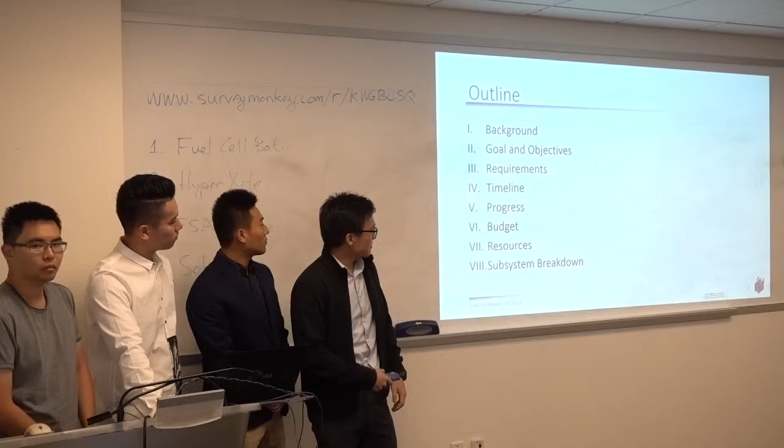So these are the general outlines that we're going to go through today. I'll be introducing the background and some of the progress that we've made, budgets and resources, and we're going to end with the subsystem breakdown.

As far as the background is concerned, this graph is showing the past discoveries of fossil fuel and the rate of consumption. Based on this trend, we see that because of limited supply and increasing demand, someday we're going to have a shortage in fossil fuel.

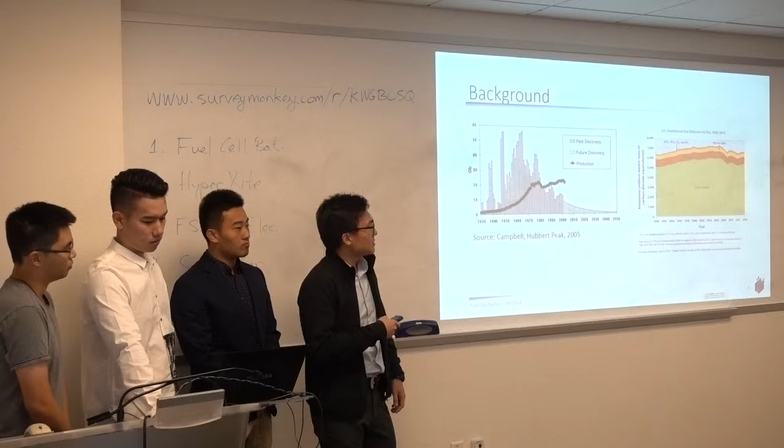This graph is showing the emissions caused by burning fossil fuel, such as gasoline, methane, natural gas. With this graph, we see that with an increasing consumption rate, we're going to have an increase in the polluting criteria.

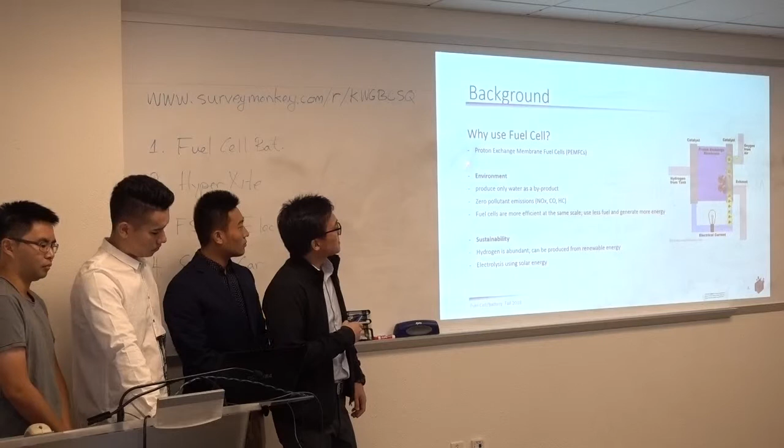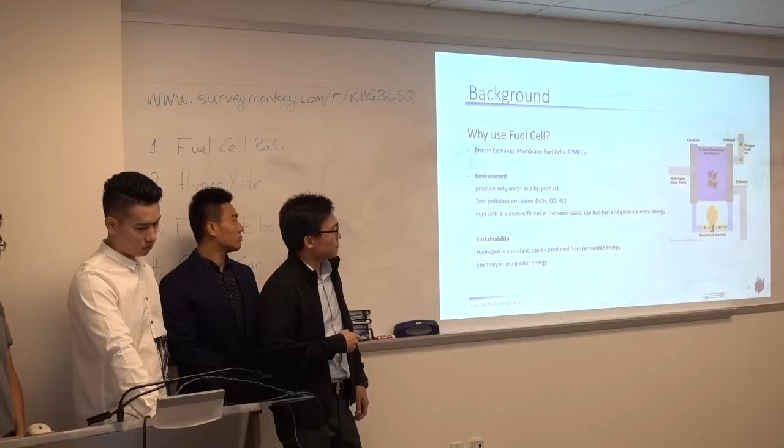With this issue, I think fuel cell is the next energy production device, because with fuel cell, especially with proton exchange membrane fuel cell, the fuel cell is operated by pure hydrogen. The good thing about injecting pure hydrogen is that water is the only byproduct, with zero pollutant emission, because there's no carbon molecule within the fuel, and the temperature is relatively low, so we don't create NOx.

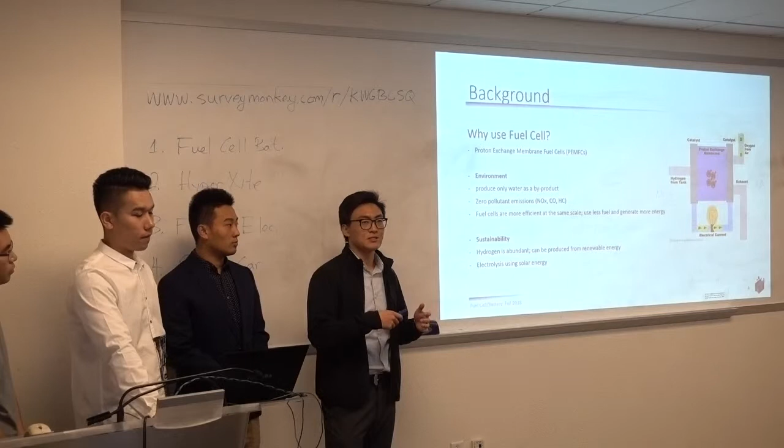The good thing is that fuel cells are generally more efficient than combustion engines, because fuel cells are not restricted by the Carnot efficiency, but instead restricted by the change in Gibbs energy, which is determined by the electrochemical potential.

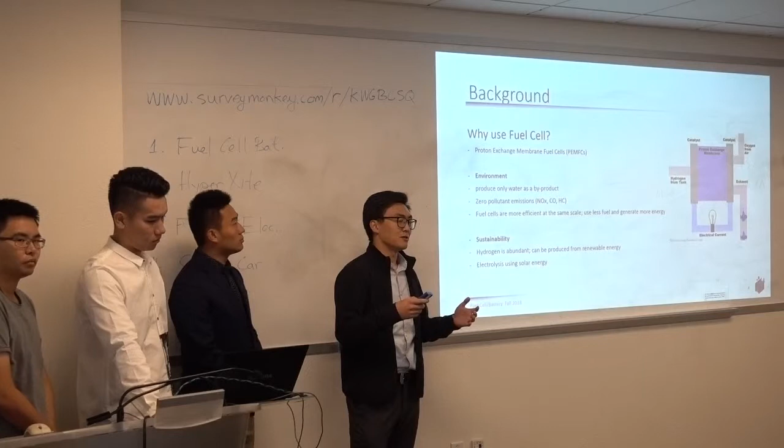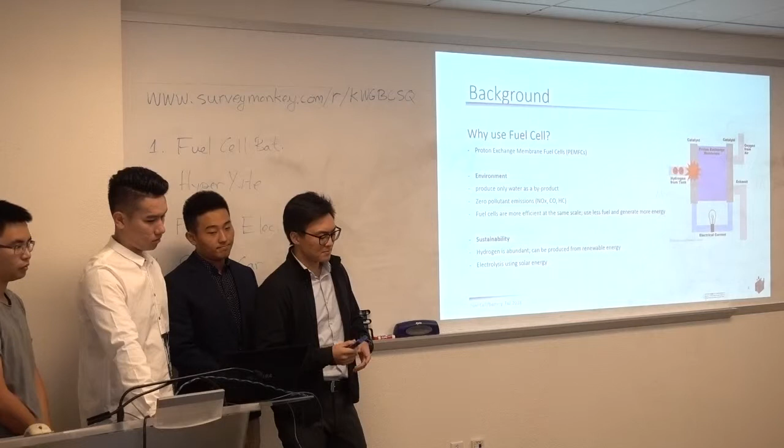As far as sustainability is concerned, hydrogen is abundant, you can find it anywhere, but we have to somehow separate hydrogen from other sources such as water. I think electrolysis is a good way to separate hydrogen from water. There is a lot of ongoing research showing how efficient electrolysis is and how we can separate hydrogen using solar energy.

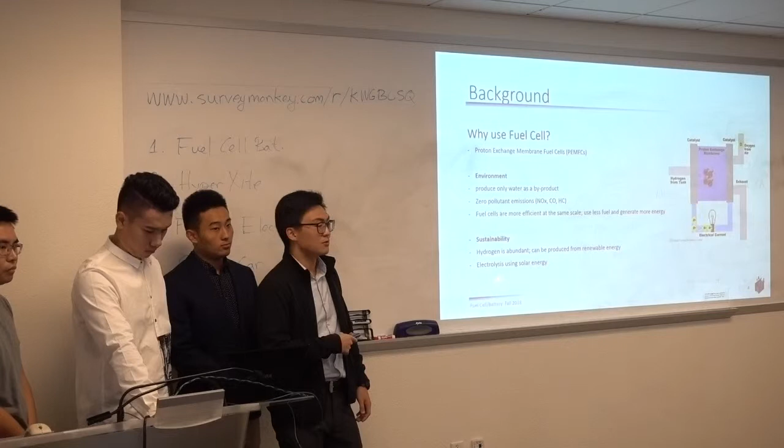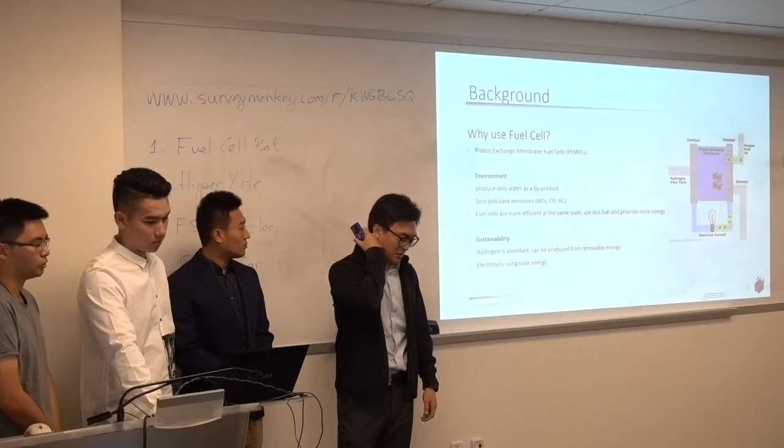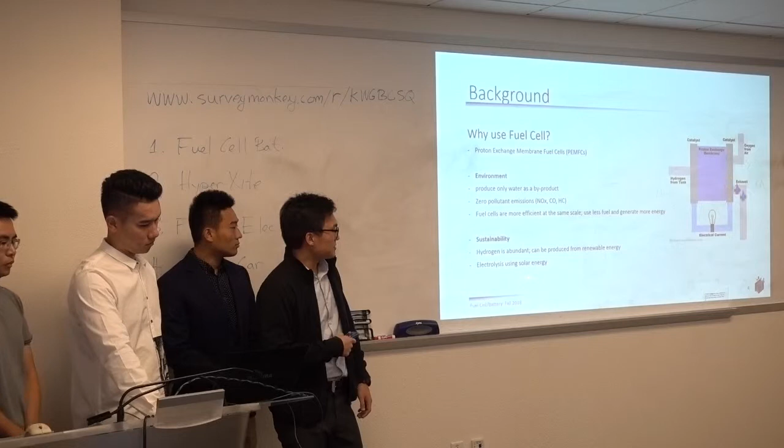There's also another research that Professor Brau is doing on using curtailed wind energy to separate hydrogen from water using electrolysis. So I think that as technology develops, we can have both renewable and sustainable energy.

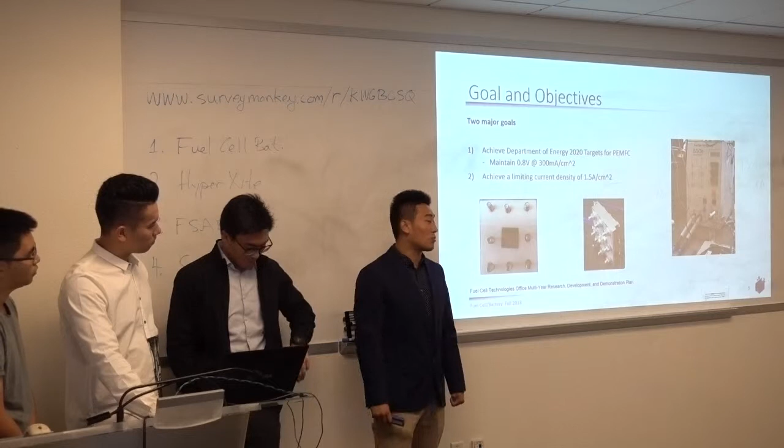As for the goals and objectives for our fuel cell battery, we have two main goals this whole year. We need to achieve the Department of Energy 2020 targets, which is to maintain 0.8 volts at 300 milliamps per centimeter square. We also need to achieve the limiting current density, which is about 1.5 amps per centimeter square. These two pictures show our fuel cell.

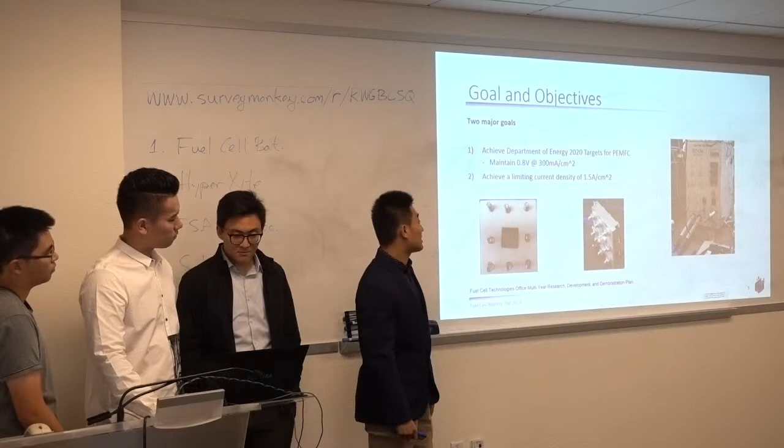This is the test station that we used for testing. We set some requirements for our sub-teams. For manufacturing, we hope that they set the limit for the bipolar plates and also the channel depth. We want our porous media porosity to be greater than 80%.

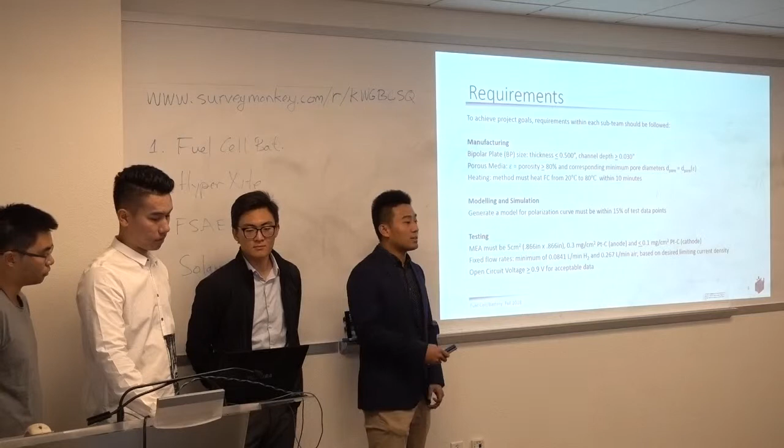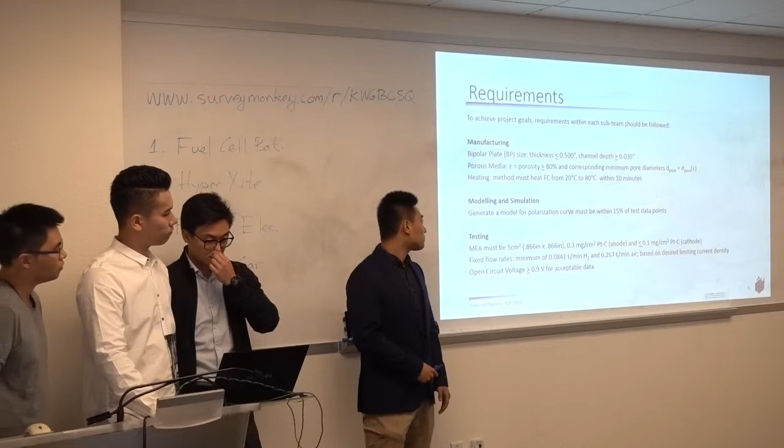We hope that the heating pad could only take 10 minutes to heat our fuel cell from 20 to 80 degrees Celsius. As for modeling and simulation, we hope that we can generate a model for the polarization curve and keep that within 15% of our data points.

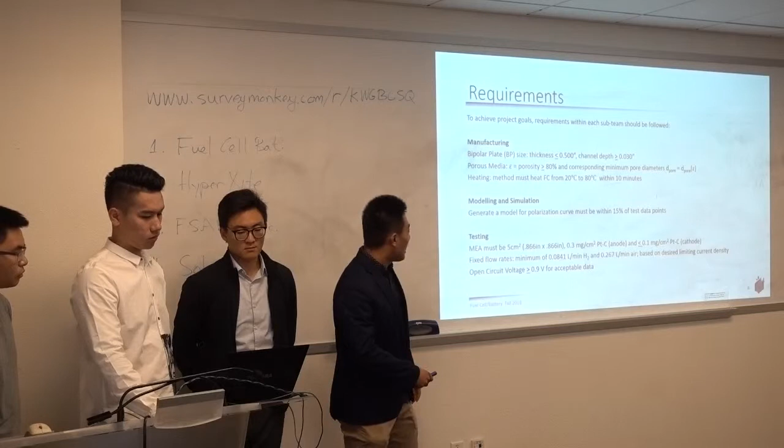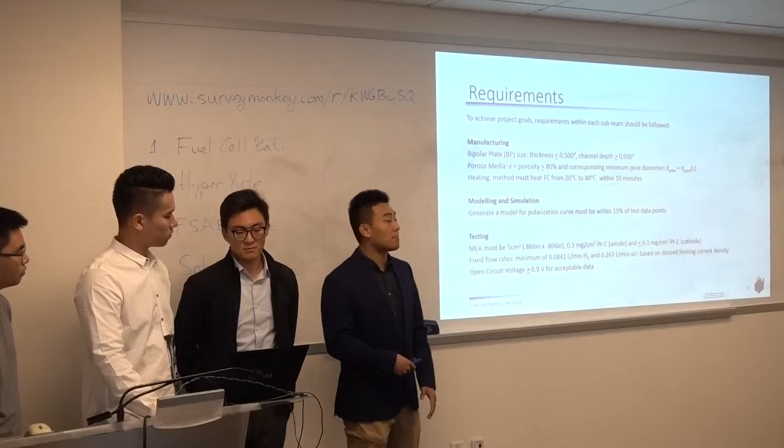For the testing team, they have to set the requirements for the MEA, and they need to calculate the flow rates based on the desired limiting current density. Before they can take measurements, we hope that we can achieve our open circuit voltage greater than 0.9 volts, because that's the minimum requirement for the PEM fuel cell.

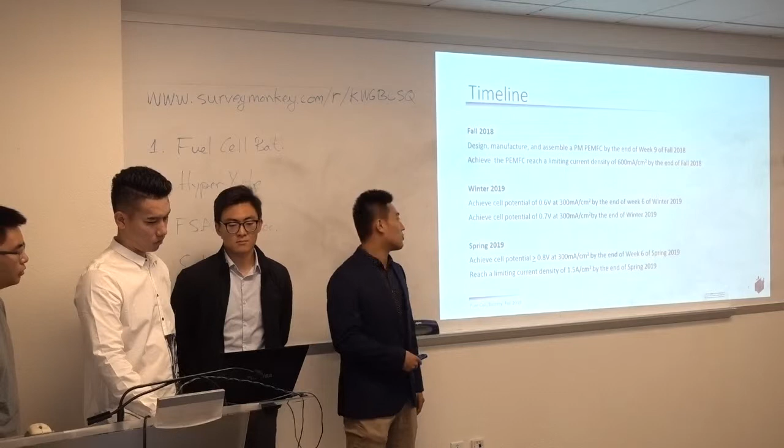For the timeline this year, we hope that we can finish our design and manufacturing by the end of week 9 this quarter, and do some testing to reach a limiting current density of nearly 600 milliamps per centimeter square. Heading into winter 2019, we hope that we can achieve 0.6 volts and 0.7 volts, both under the 300 milliamps per centimeter square.

By the end of the spring quarter, we hope that we can achieve our ultimate goals, which is to maintain 0.8 volts at 300 milliamps per centimeter square, and also 1.5 amps per centimeter square for the limiting current density.

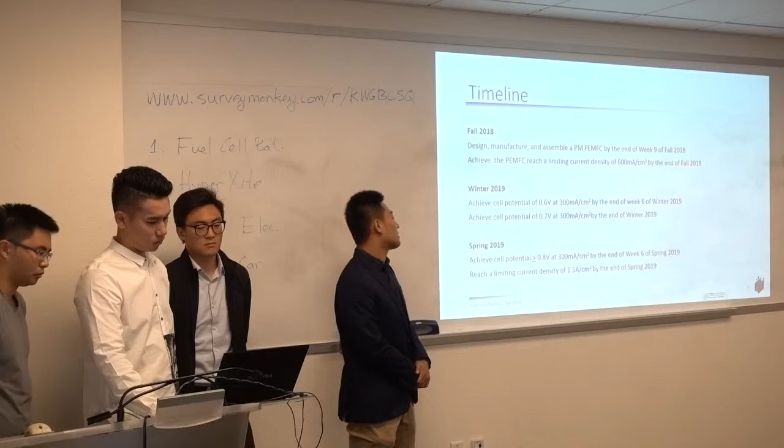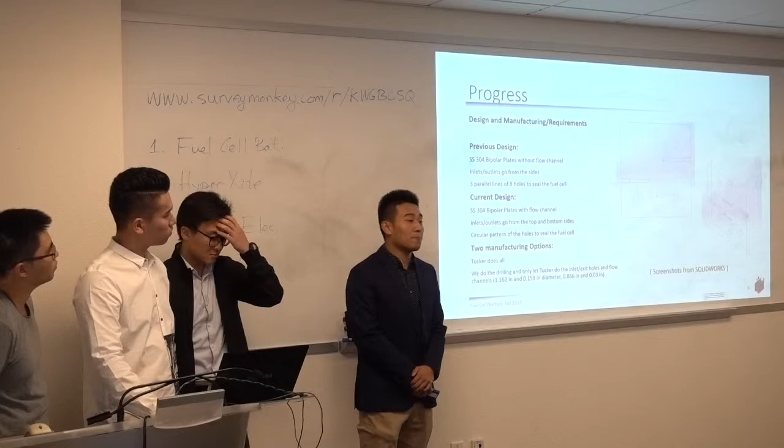We have some progress based on our previous design. This year, we're going to still use the stainless steel 304 bipolar plates, but this time we add flow channels in it, because we think that this will evenly distribute the flow and make the reaction efficient.

We changed the locations of the inlets and outlets. Previously it was on the side of the bipolar plates, but this time we changed to the top and bottom, so that we can directly connect to the test station and solve the problems of condensation in the intermediate tubing.

We changed the fastener holes. Previously it was like a parallel, 3 parallel line pattern, but this time we changed to a circular pattern, and it is easier for us to attach the heating pad, and also easier for us to seal the fuel cell.

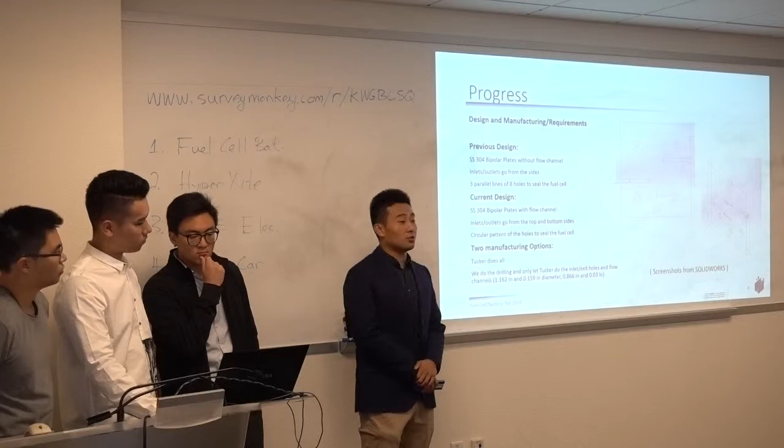We have two manufacturing options. The first is we send all the parts to Tucker, and he will do all of that, but it will cost more. The other is we do the drilling of the fasteners, and only let Tucker do the inlet and exit holes and the flow channels for our fuel cell, because those are more precise. So I will hand my presentation to my colleague.

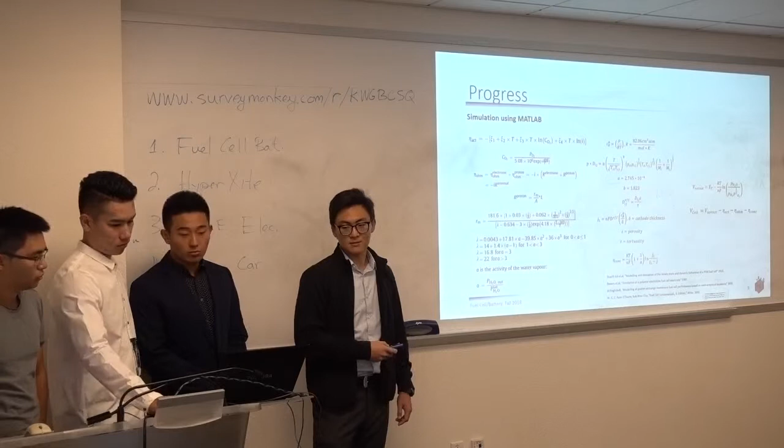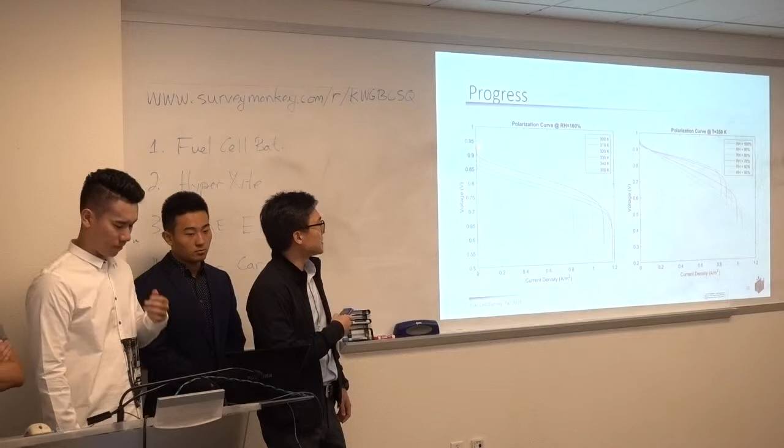As we vary the temperature, there is an effect on the ohmic loss, which is this here, the linear region right here.

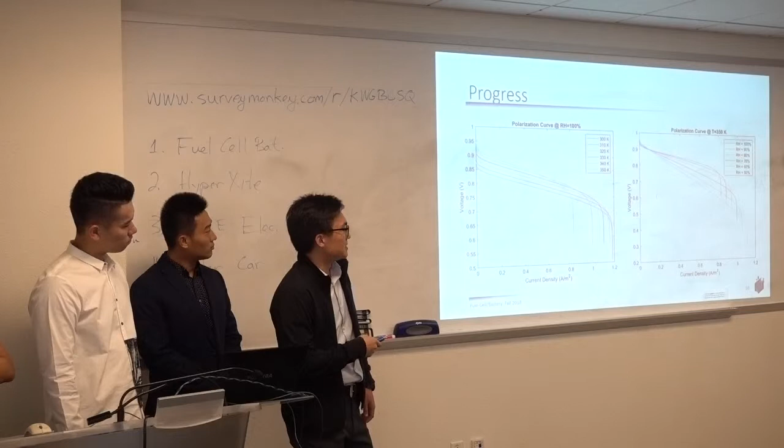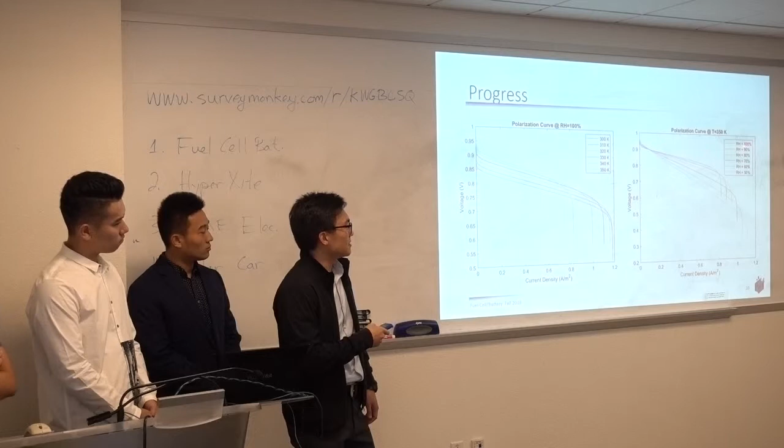And this curve, we set the temperature constant at 350 Kelvin and vary the relative humidity from 100% to 50%. This is quite interesting because we would think higher relative humidity results in better polarization curve, better efficiency. However, when we use 100% relative humidity, we get lower current density. That's because the water accumulates at the exit of the fuel cell, which limits the activity due to a limitation of mass transport.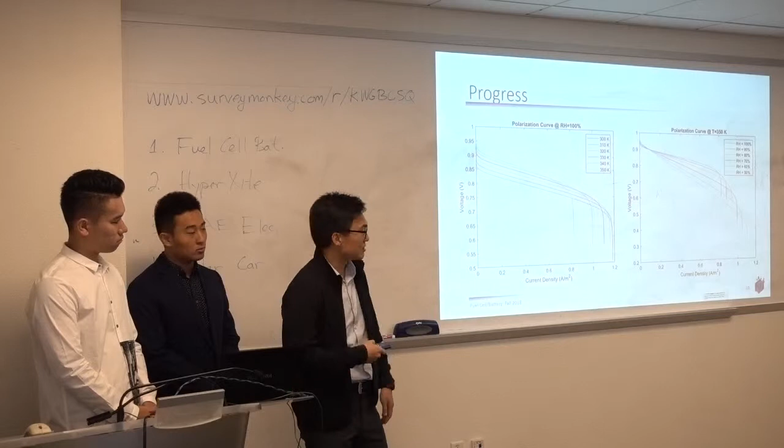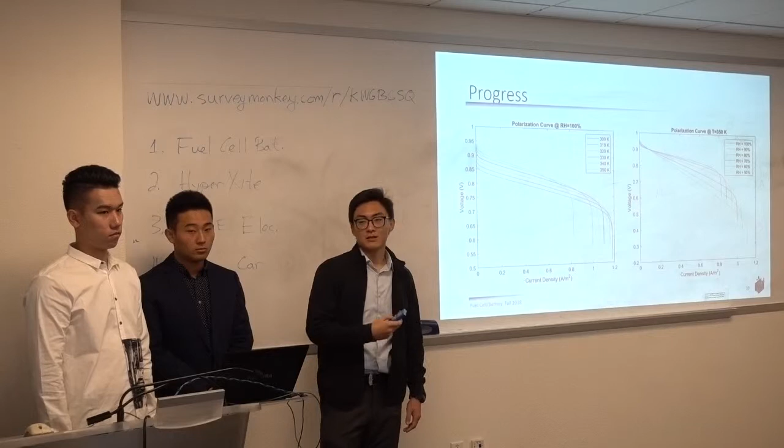Based on these two, we hope to actually validate these two curves with our own testing fuel cell. That's our next quarter's and spring quarter's goal.

Now I will show you some simulation we've done so far for our new design flow channel. When we finish our CAD model, we plug it into ANSYS Fluent. By using these simulations, we can easily determine the pressure distributions and flow streamline profile for our new design, which is very important because the concentrations and activities of the reaction inside the fuel cell are closely related to the pressure.

As the first picture shows, we meshed our flow channel model into around 80,000 meshing elements. Then we simulate the pressure distributions at the interface, shown in the middle picture as the rectangular area, which is the approximate pressure of the reactants at the reactant site. By doing these simulations, we can make qualitative assumptions about our fuel cell performance, and verify if it generates desirable pressure distributions that can meet our overall requirement, which is 0.8 volt at a current density of 300 milliamps per centimeter squared.

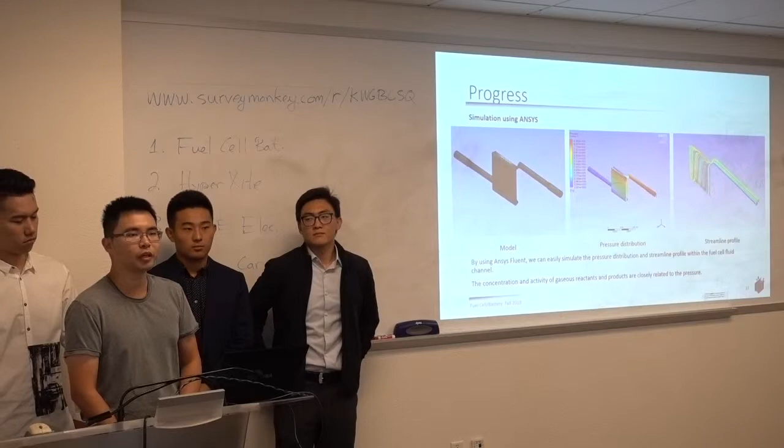For the budget, our total budget is $3,000 for this year. The estimated cost of materials, including all of the plates, tubes, and fittings, is about $450.22. The estimate for manufacturing has two options, as discussed earlier. The first one is Tucker will do everything, estimated cost about $325.

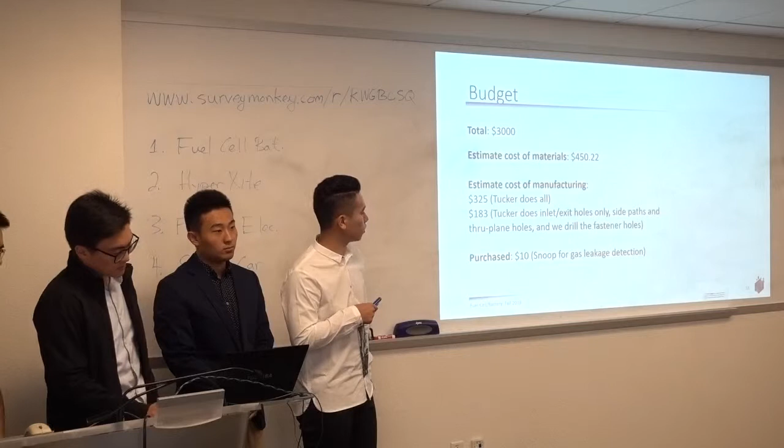The second option is that Tucker will only do the inlet and exit holes, and it will cost about $183. For now, we only purchased the snoop for gas leakage detection, and it costs $10.

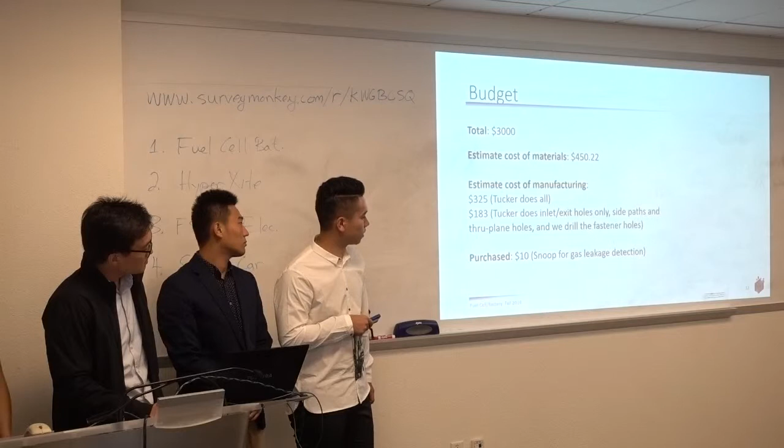For resources, here is how many units and how many hours our team members are taking. We can get some resources from the Renewable Energy Resources Laboratory, which is the location we are working at, and we can also get other resources from the National Fuel Cell Research Center.

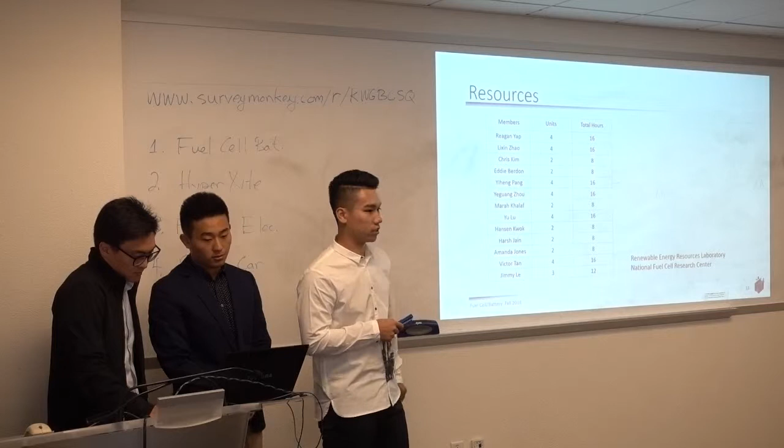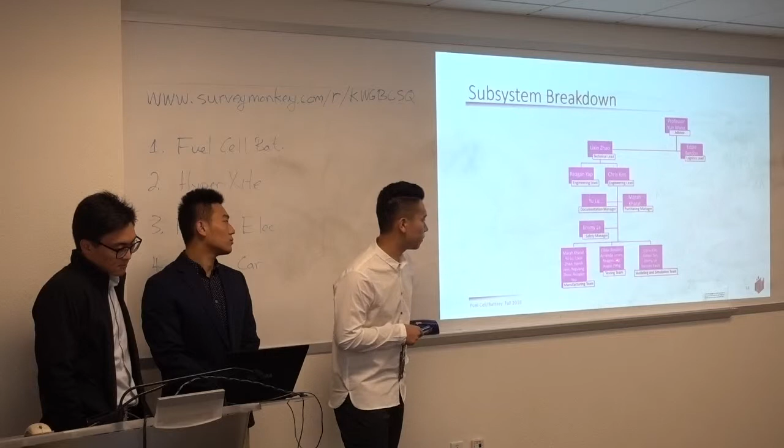Here's our subsystem breakdown. Professor Wang is our advisor helping us finish the project. We have two team leaders, the technical lead and the logistics lead, Lixin and Eddie. There are three teams in our project: manufacturing team, testing team, and modeling and simulation team. There are 13 people in total in our project.

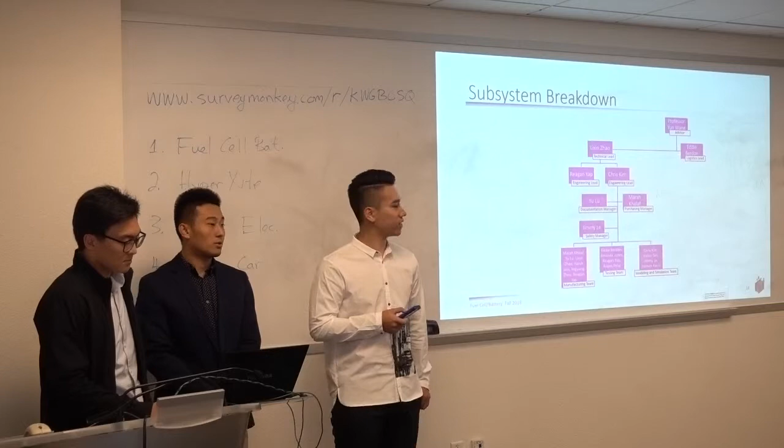We hope we can finish our goal and the timeline. Thank you for listening.